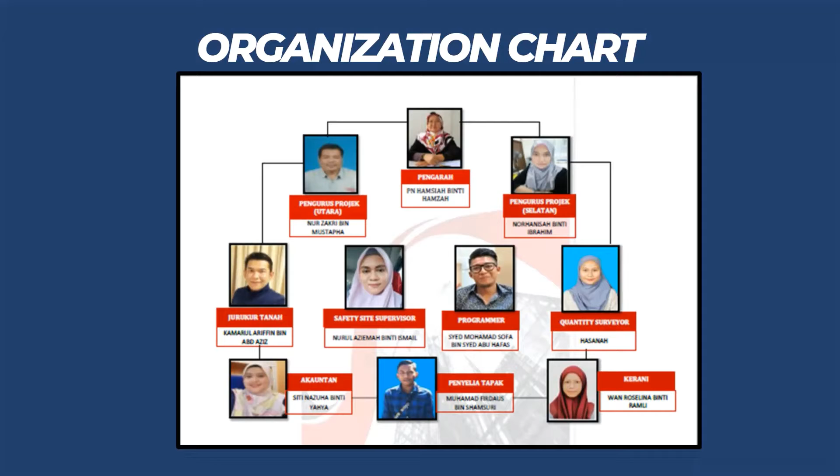The working environment of the company is mainly focused on construction management, tender paperwork, taking off bungalows, and quantity surveying. First, I registered myself and had an introduction to the company.

I learned about one of the ongoing projects, a vocational school in Ipoh. This project is grade 6.

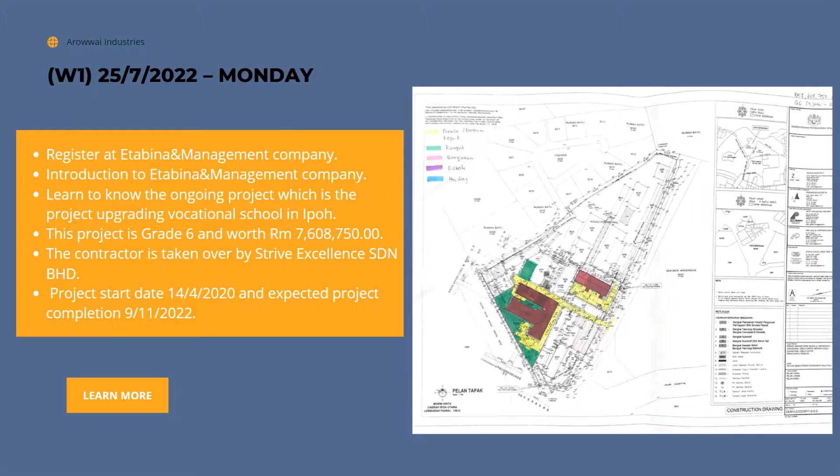Site visit for the glove manufacturing factory project, including associated works at Daerah Manjung. Went through the plan for TNB and consumer substation at the site and compared the structural plan to the real TNB substation location.

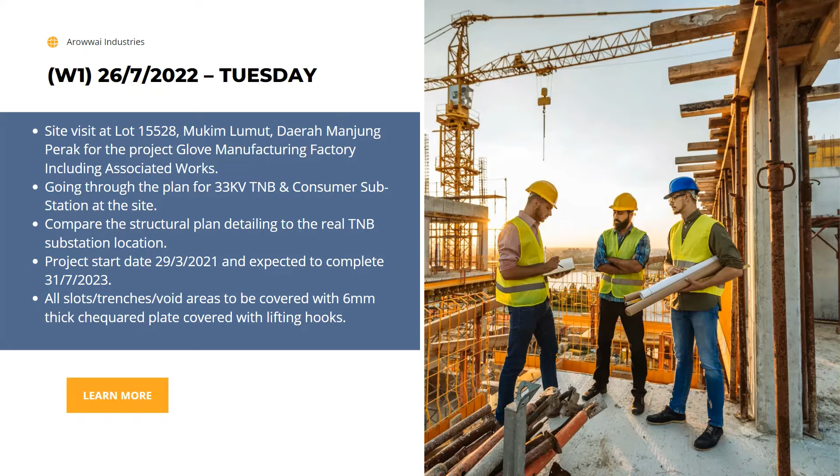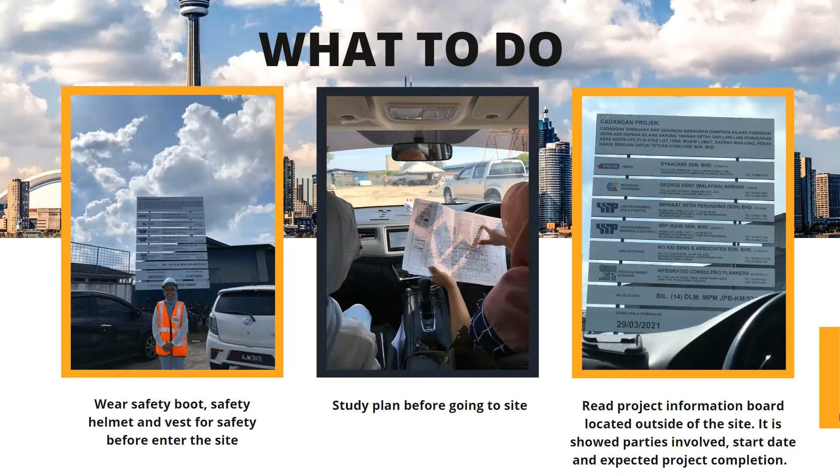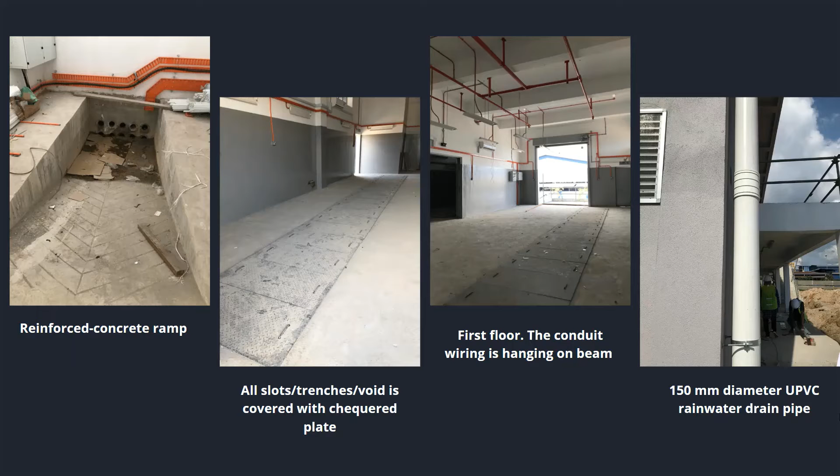First, before going to the site, we need to wear safety boots, safety helmet and vest for safety before entering the site. Next, study the plan before going to site and read the project information board located outside the site. These are site photos of the TNB substation that were taken by me. This is the construction element that I learned about the TNB substation.

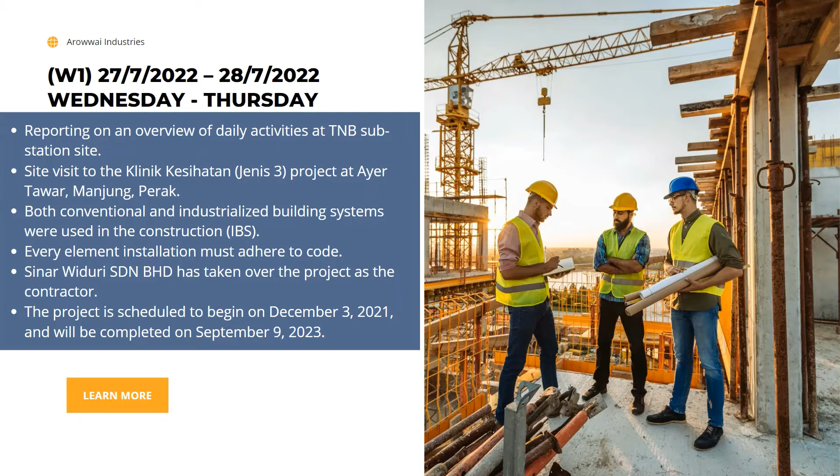The next day, site visit to the Klinik Kesihatan Jenis 3 project at Ayer Tawar, Manjung, Perak. Both conventional and industrialized building systems were used in the construction. Like usual, before going to site, wear safety boots, safety helmet and vest. Next, study the plan before going to site and read the project information board located outside the site.

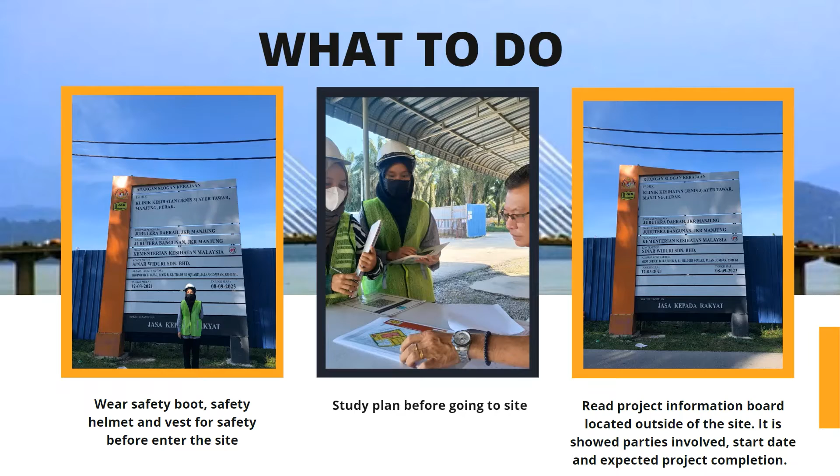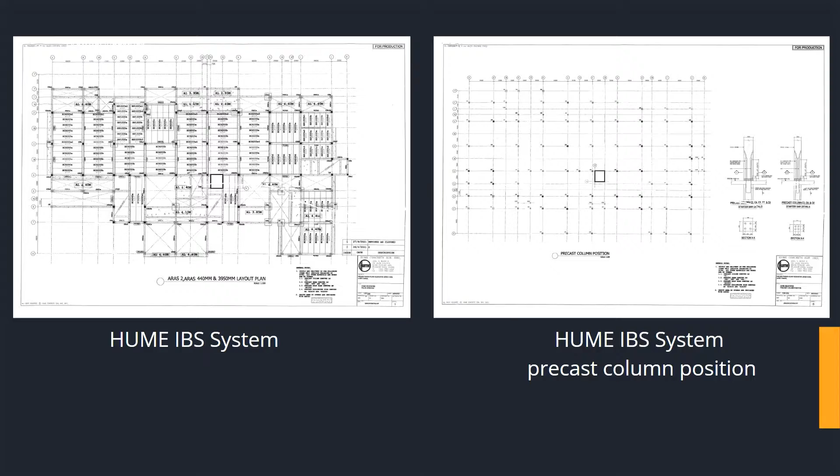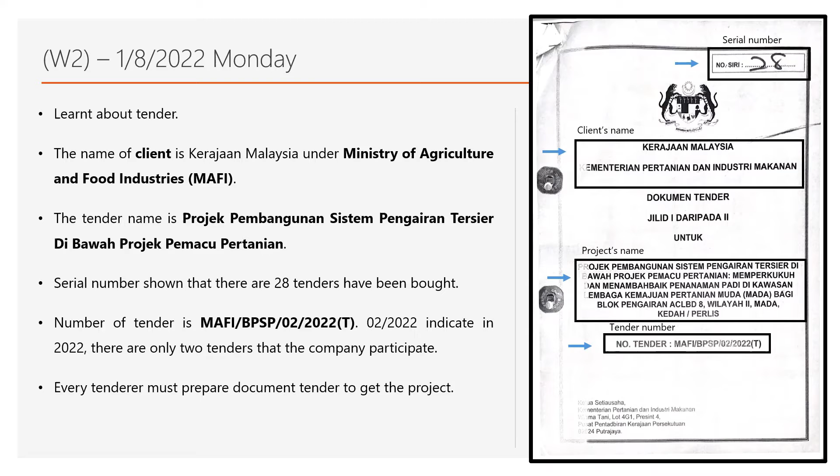In week 2, I gained knowledge about tender covers, such as the name of the client, the name of the tender, meaning of the serial number and tender reference number. I was also exposed to the requirements needed in the tender document checklist. The checklist aims to help tenderers submit complete tenders without any errors.

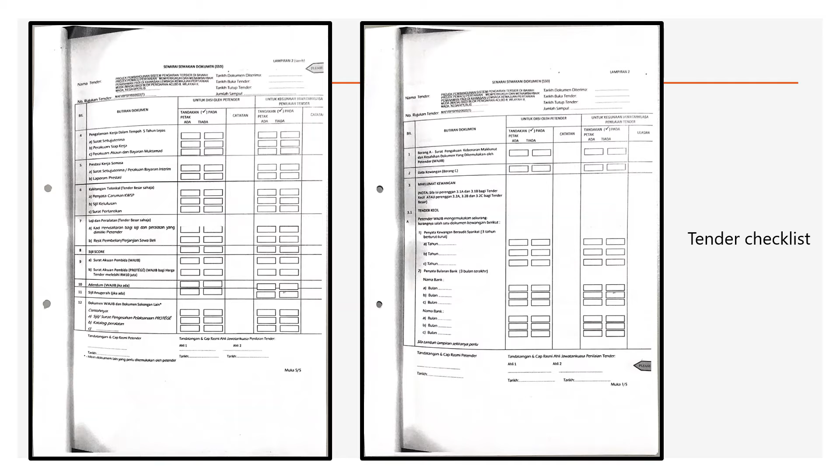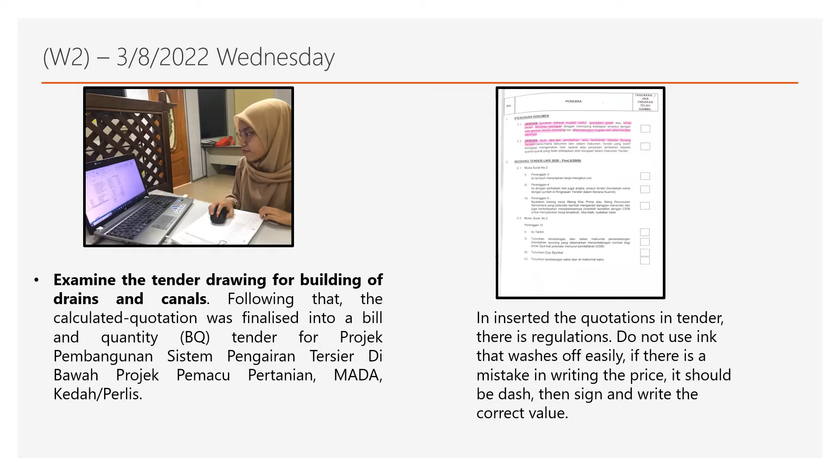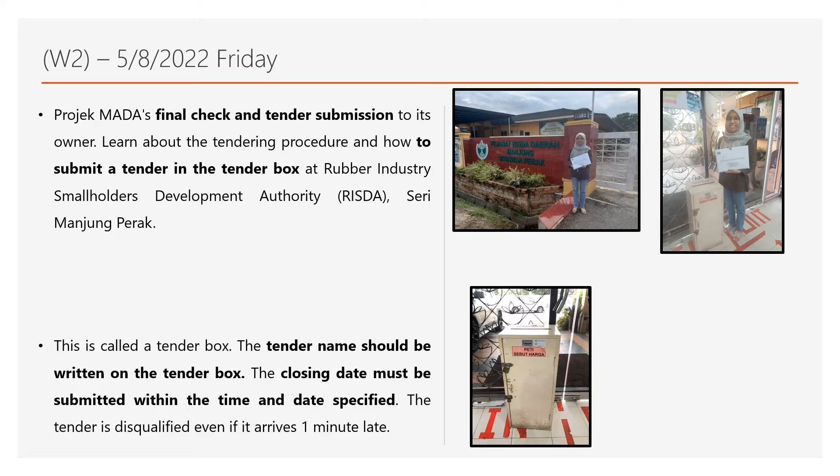Next, for the second day, I learned how to key in tender prices using Microsoft Excel. When the value is approved, I noted it on the bill of quantities (BQ) of the tender. The very next day, I learned about the tendering procedure and how to submit a tender in the tender box.

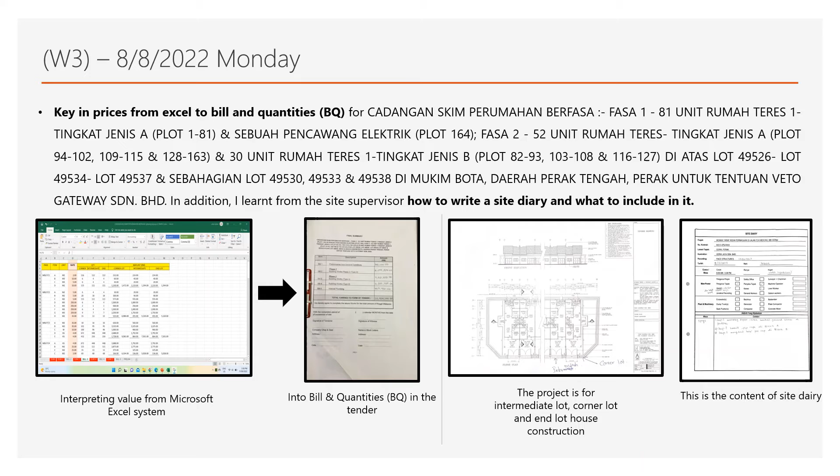For week 3, I learned to interpret data from Microsoft Excel into BQ for the project cadangan skim perumahan berfasa at Mukim Bota, Perak. I also learned how to write a site diary and what to include in it.

The next day, I keyed in price values from BQ for projek jalan perhubungan di perkampungan dari Kampung Tulit ke Kampung Mat Daling dan jambatan ke SK Gusai, Jerantut, Pahang into Microsoft Excel, and did a method statement for drain installation along the WCE Expressway. I also attended a meeting with my supervisor and visited the site at Madrasah Darul Ulum Wal Qiroat in Pantai Remis, Perak.

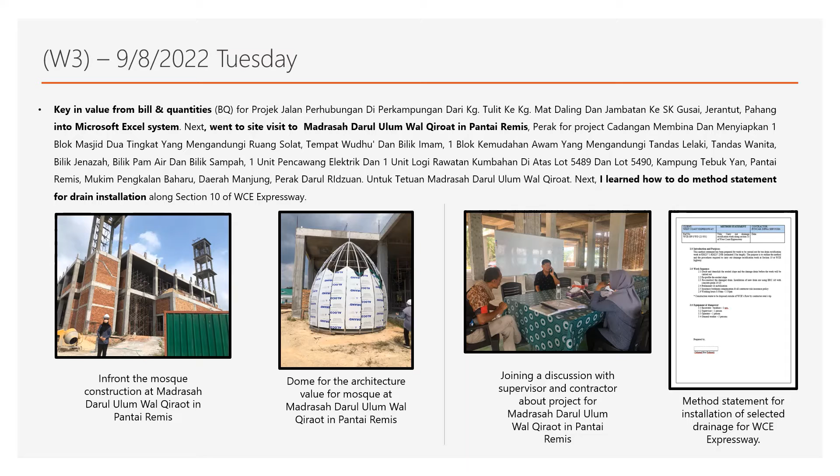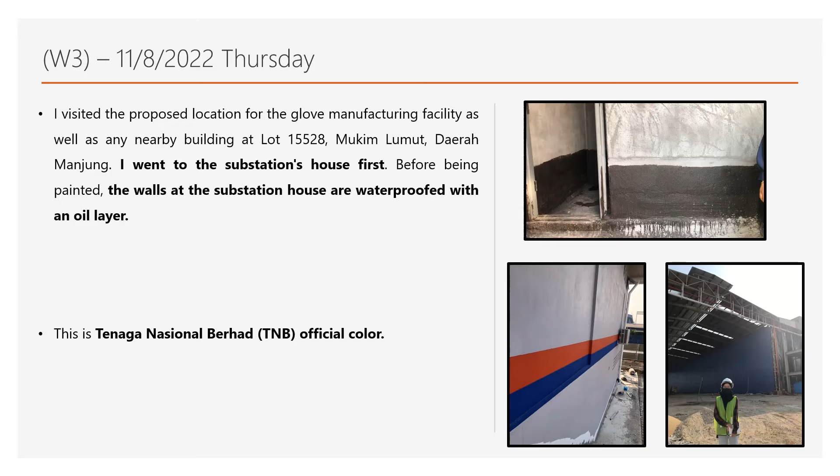On Thursday, I went to the glove manufacturing facility as well as nearby buildings at Lot 15528, Mukim Lumut, Daerah Manjung, to see the progress. I got the chance to witness how a machine forms reinforcing bar.

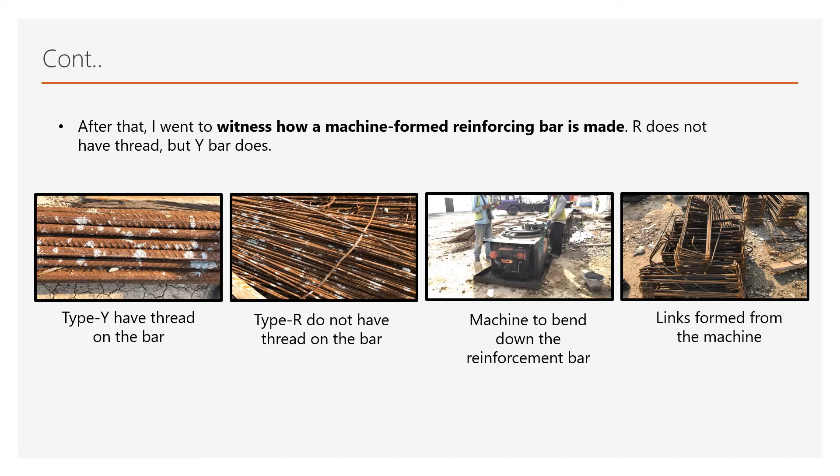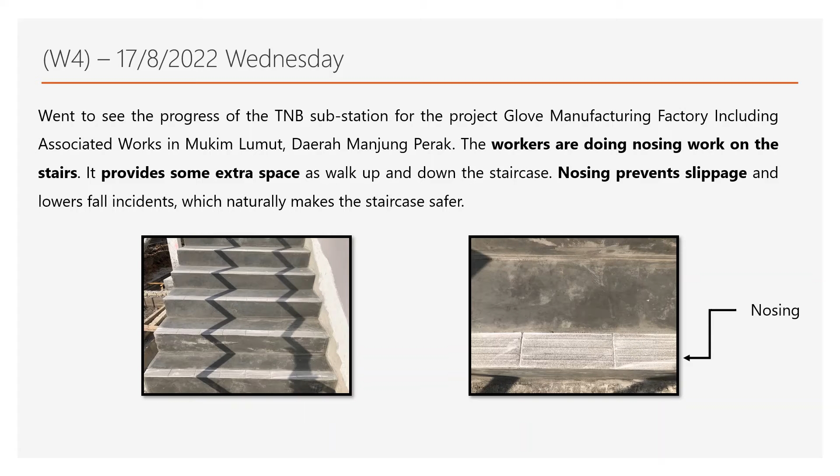In week 4, I went to see the progress of the TNB substation. The workers were doing nosing work on the stairs, which provides extra space for walking up and down the stairs. Next, I visited the pump house.

On Friday, I learned how elements of IBS structures are installed for the project Piawai Klinik Kesihatan Jenis 3 (KK3) Ayer Tawar, Perak.

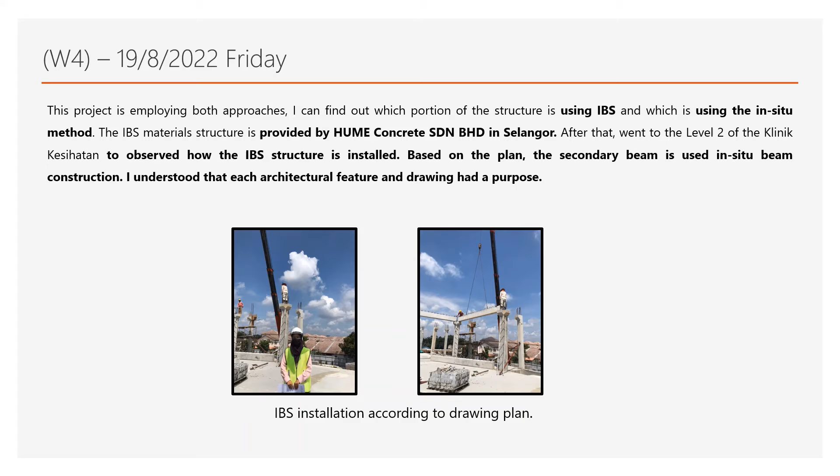In week 5, I went to Jalan Toh Mekong, MD Gerik, Perak, to observe how the menaik taraf kedai perniagaan project was progressing.

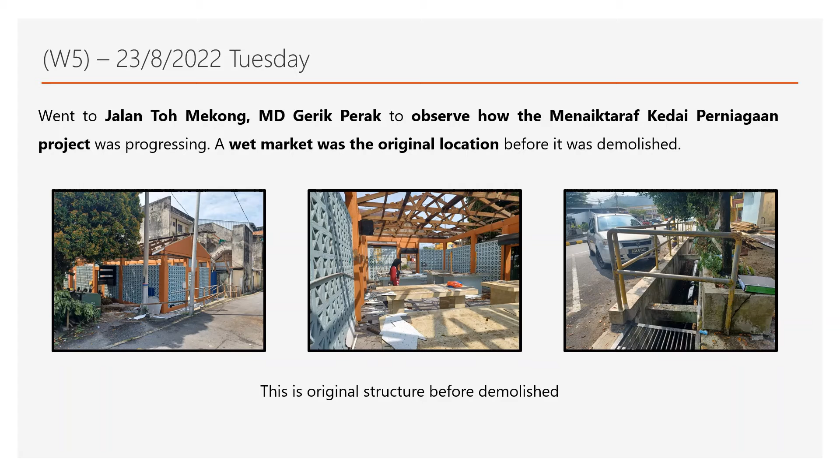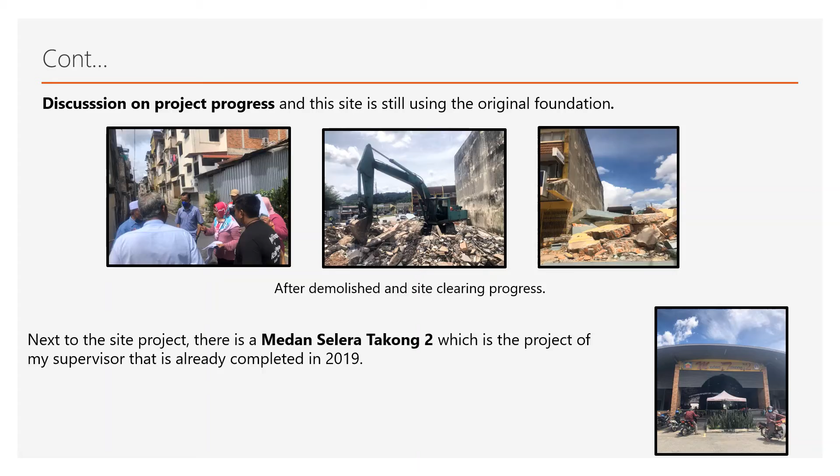Next to the site project, there is Medan Selera Takong 2, a project of my supervisor that was already completed in 2019. Later, I got the chance to pray at Masjid Karya Kampung Sayong, Lembah, and got to know the materials and architecture used there.

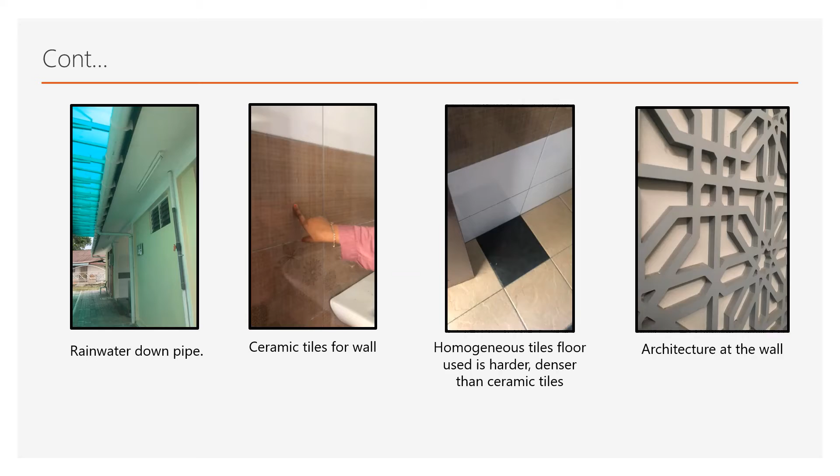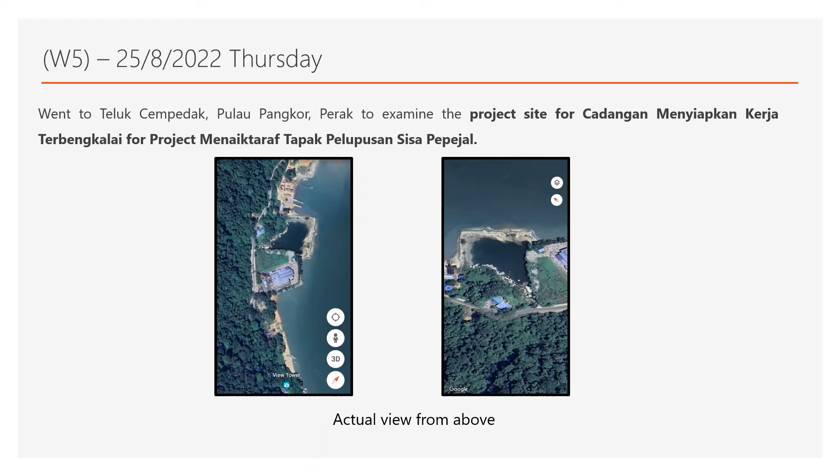At every lake line, a geotextile bag is utilized to prevent water from entering the lake close to the damp spot, allowing that space to be used to build a new dumping location.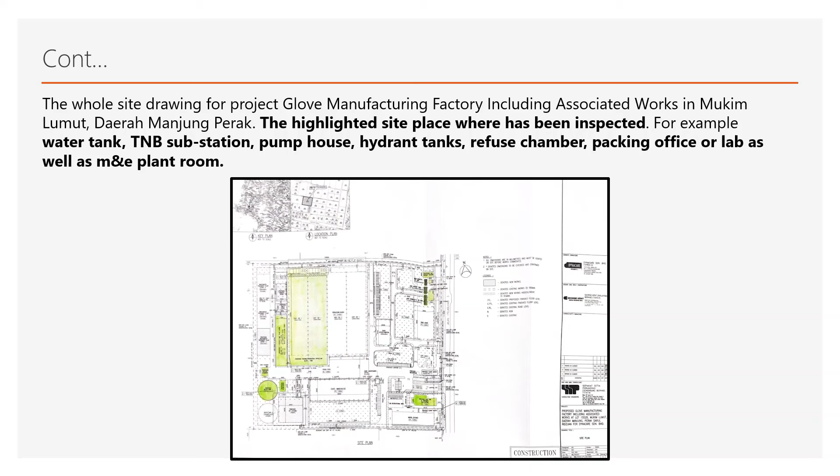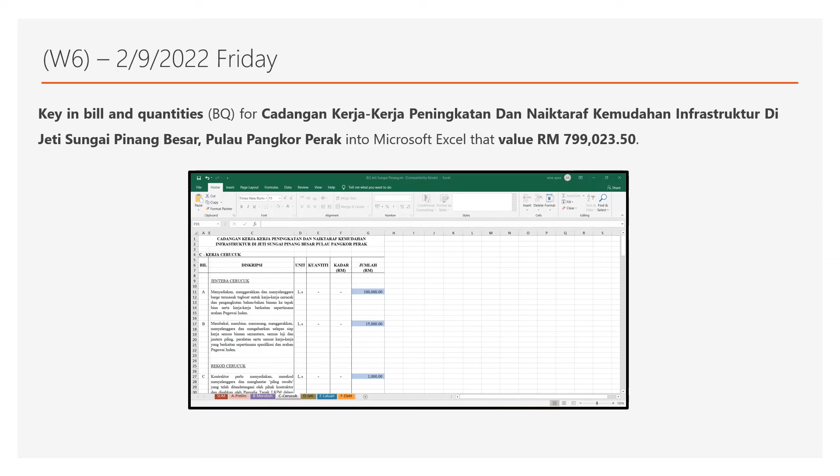On Friday, I keyed in the bill of quantity (BQ) for cadangan kerja-kerja peningkatan dan naik taraf kemudahan infrastruktur di Jeti Sungai Pinang Besar, Pulau Pangkor, Perak.

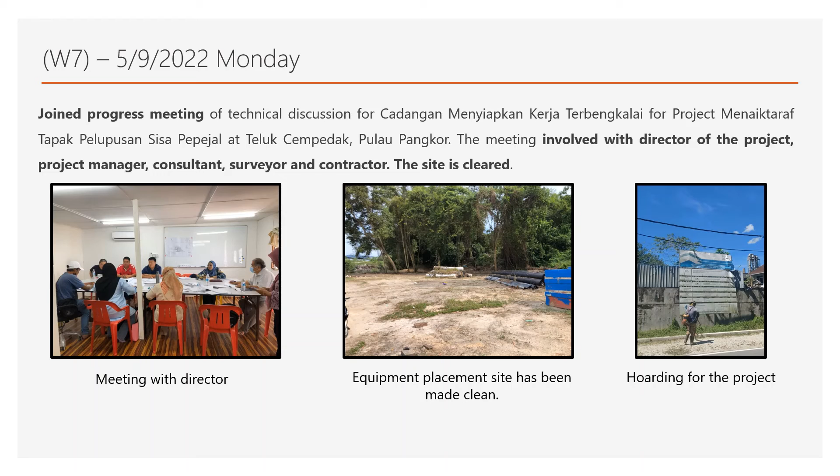In week 7, I joined a progress meeting and technical discussion for the sisa pepejal project at Pulau Pangkor. The meeting involved the director of the project, consultant, surveyor and contractor.

Then I went to see the incinerator where the waste is processed, and the end result is that the waste is burned and turned into ash. The garbage is loaded using a backhoe. The ash is tied in a white sack and transported outside of Pulau Pangkor.

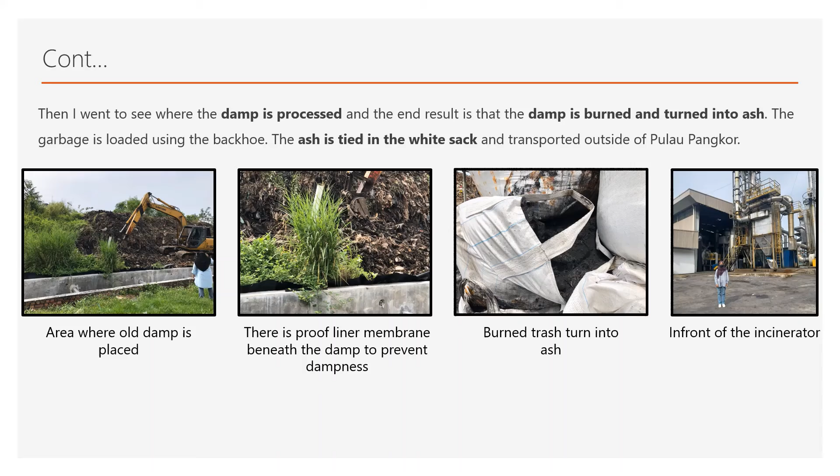On Friday, I prepared a site diary for the project pelupusan sisa pepejal in Pulau Pangkor for the months of July, August and September.

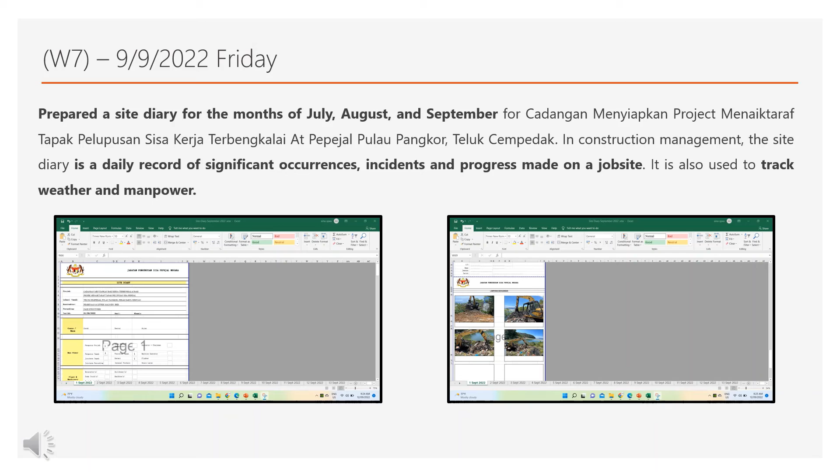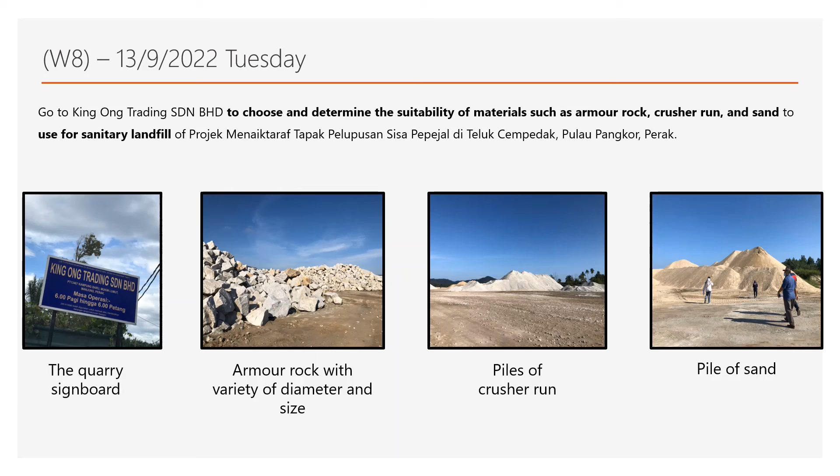In week 8, I learned to choose and determine the suitability of materials such as armor rock, crusher run and sand for use in the sanitary landfill site project. The crusher run is 20mm in diameter, while armor rock must be at least 500mm in diameter. A measuring tape is used to take measurements. All samples are examined and placed in a sack, then sent to the laboratory in Ipoh for material approval.

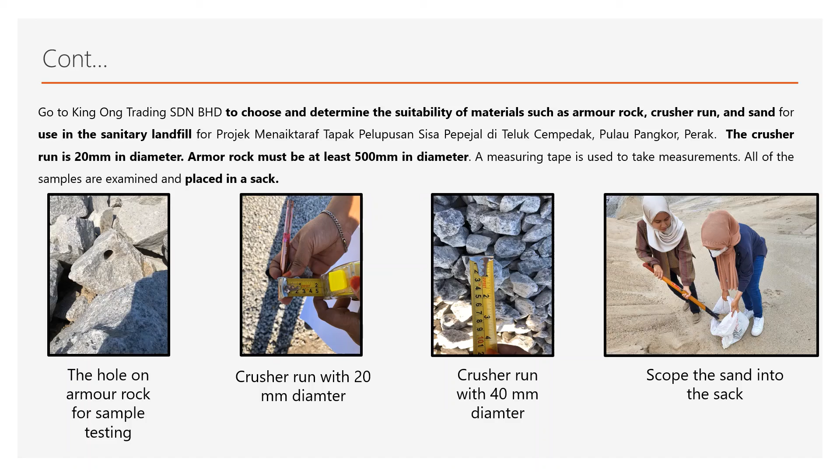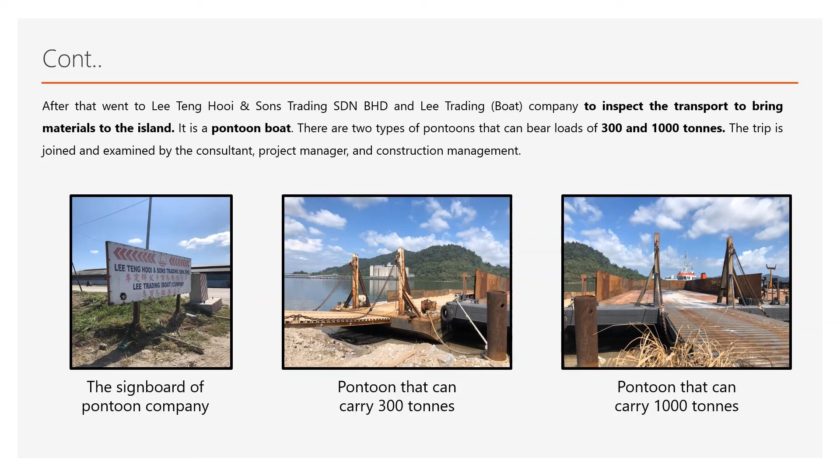Next, I went to see the clay soil quarry. Following that is the process of transporting construction material to Pulau Pangkor using a pontoon. Each pontoon has a maximum load it can carry, and it takes around 3 hours to reach the island.

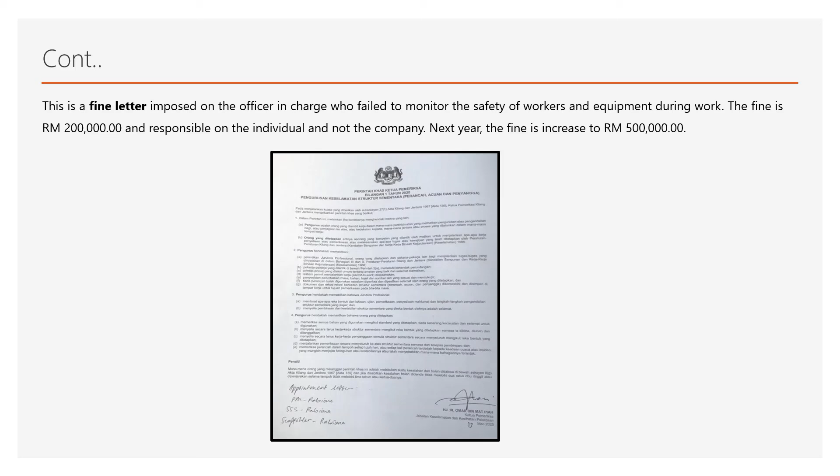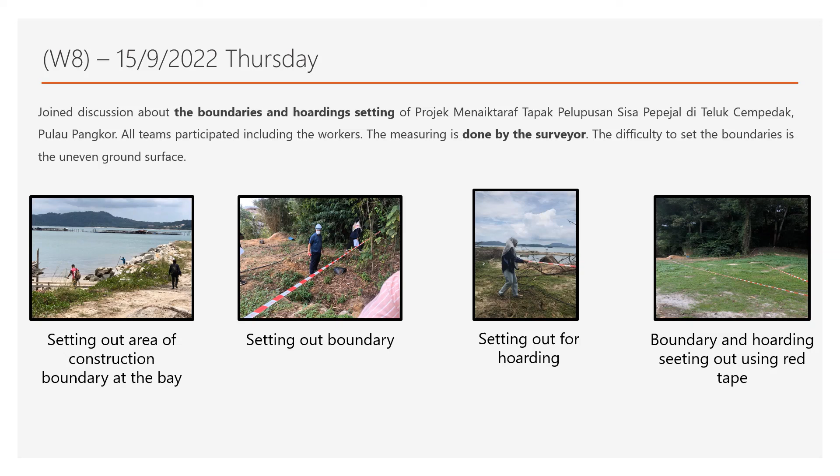This is a fine letter imposed on the officer in charge who failed to monitor the safety of workers and equipment during work. On Thursday, I went to Pulau Pangkor. Before construction can begin, the surveyor sets the boundaries and hoarding. Red tape is then used to warn people not to enter the area while construction is taking place. Next, I measured the depth of the water reservoir.